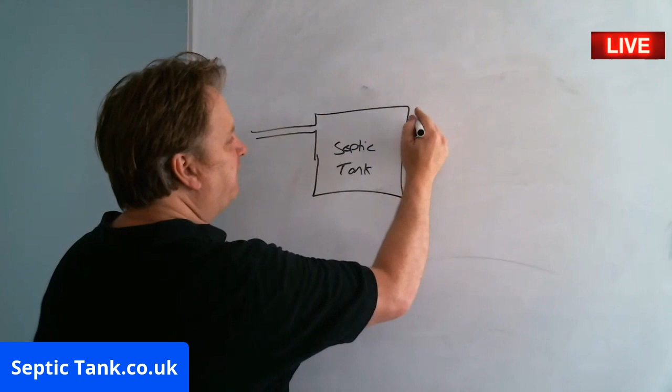Anyway, so let me show you the difference between a septic tank and a sewage treatment plant. So let's start with a septic tank. So let me draw a septic tank. We'll call that, look, septic tank - pretty straightforward, isn't it? So we've got an inlet pipe going into it, and a bit further down we've got an outlet pipe going out of it.

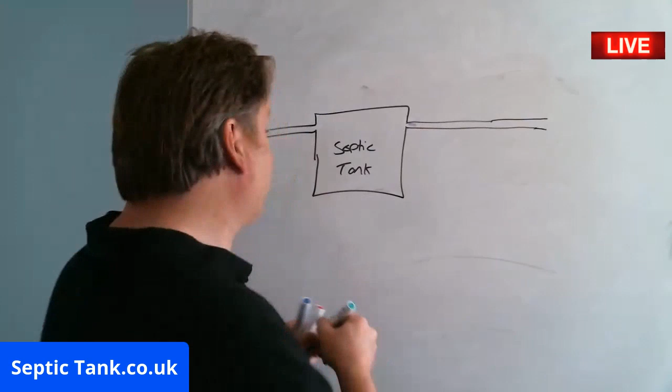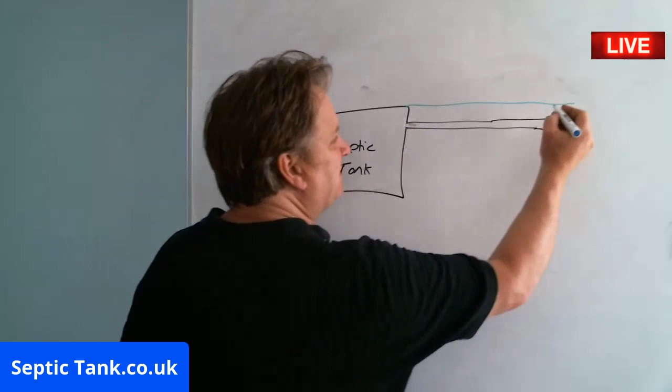Okay, so let me give it some grass - not the stuff you smoke - some green grass. Look at that. And I don't know if grass is any different color, is it? Well, actually, the grass outside is brown today because it's been so hot. But anyway, so here's a septic tank, and that's water.

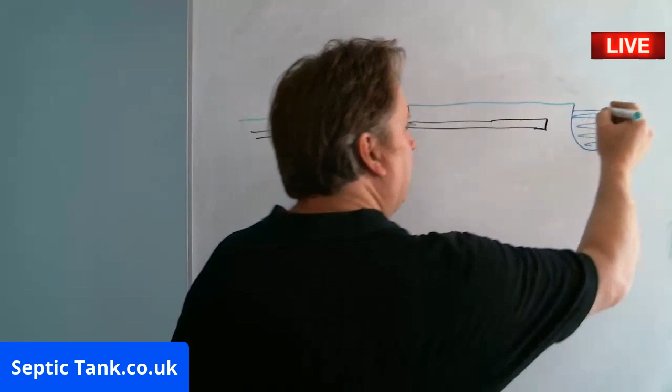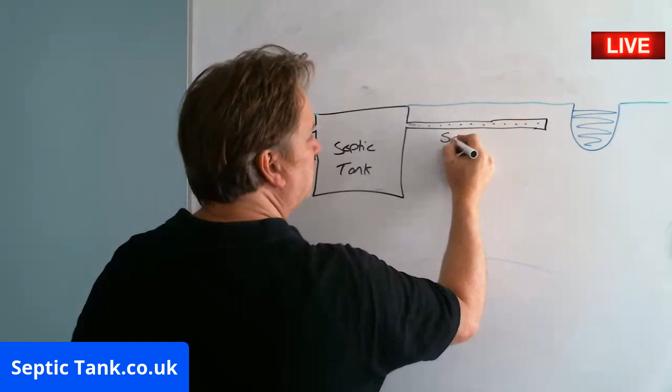And I'll put that there - you'll see where I'm going with this in a minute. And don't tell me you're amazed at my drawing skills, I know. All right, so there's the septic tank, there's the soakaway, there you go. That's not too bad, is it?

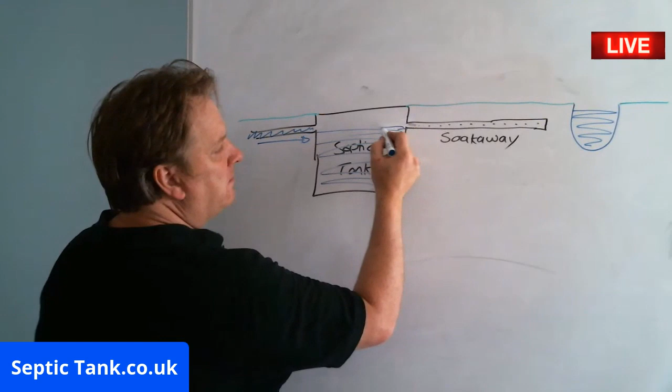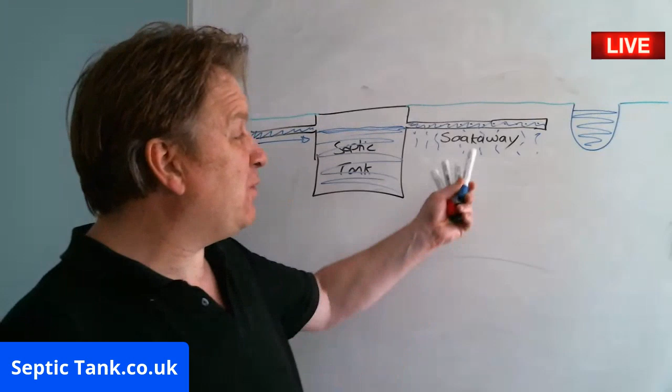Okay, let me quickly explain how a septic tank works. You've got raw sewage in the form of wastewater that goes into the septic tank, and then it fills the septic tank up. Then when it gets to this level here - let's just make it a bit higher - the wastewater then goes into the soakaway here and drains away into the soil. So that's how a septic tank works. The soakaway is probably the most important component of the septic tank, because if the water didn't soak away, the tank would just get full and then it would overflow and stink and back up to the house. So that's how a septic tank and soakaway work.

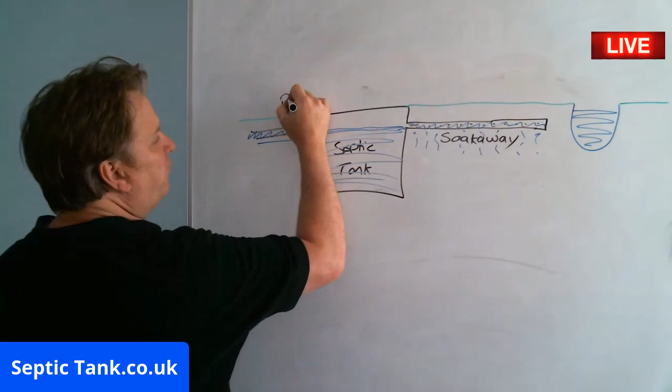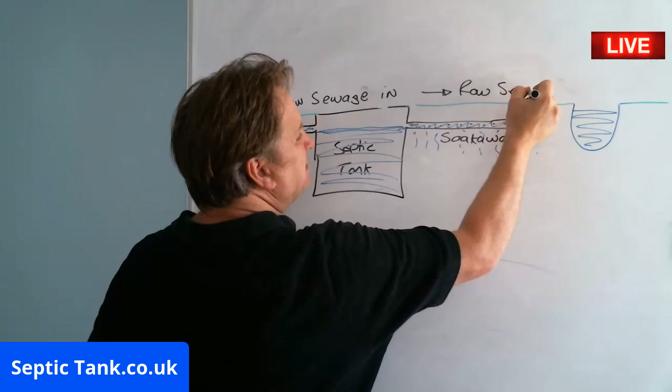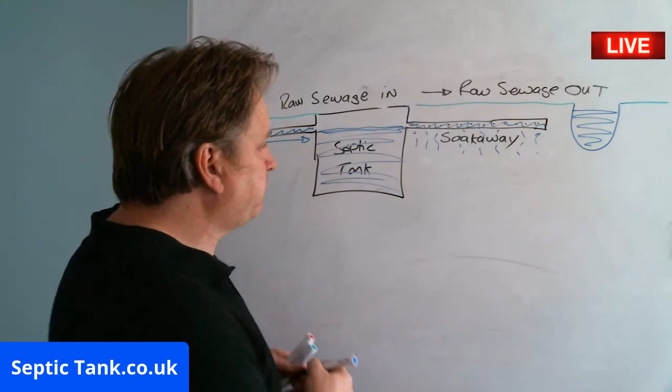I'll tell you a bit more about this thing here in a minute. So the basic difference is: with a septic tank, you've got raw sewage goes in and raw sewage goes out. That's basically it - raw sewage goes in and raw sewage goes out, and the soil treats and cleans the sewage. It's pretty straightforward, isn't it?

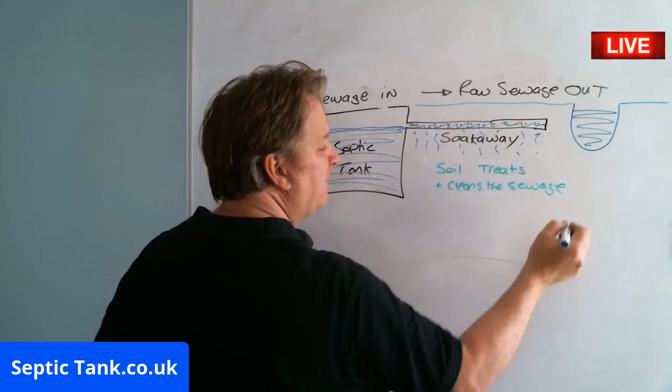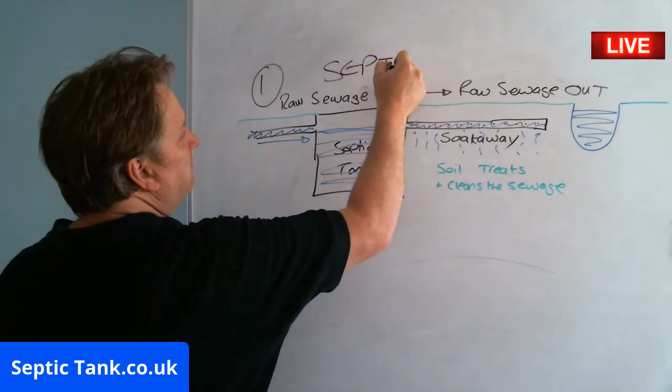Okay, so that is number one - septic tank. Okay, that's cool, isn't it? Okay, so I got the right pens there. All right, so number two now. Now I'm going to show you - let me see how much space I've got there. I keep looking back because I've got a monitor there that tells me if I go out of the area.

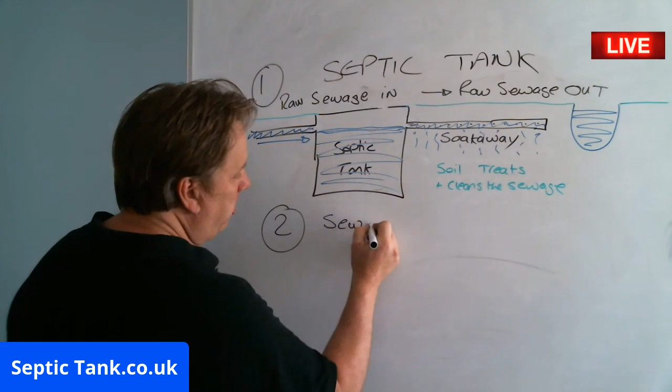So now I'm going to do a sewage treatment plant. All right, so again we've got pretty much the same scenario here - we've got a pipe coming in. But I'm going to give the sewage treatment plant a different colour because they're normally green for some reason - don't ask me why, they're all green, but they are. And it looks something like this - let's give you a typical shape of a sewage treatment plant. I know that looks like something out of Close Encounters of the Third Kind, but it's not meant to be, right? That's what some of them look like, okay?

So you've got your pipe in, you've got your pipe out, and then let me cut - now here's the grass. You've got a green lid because it blends in with the grass. How much have I got there for water? Yeah, I've just got enough.

That's water in there. Is that on the screen? Yes, okay, so that's on the screen. So we'll call that the outlet pipe. There you go.

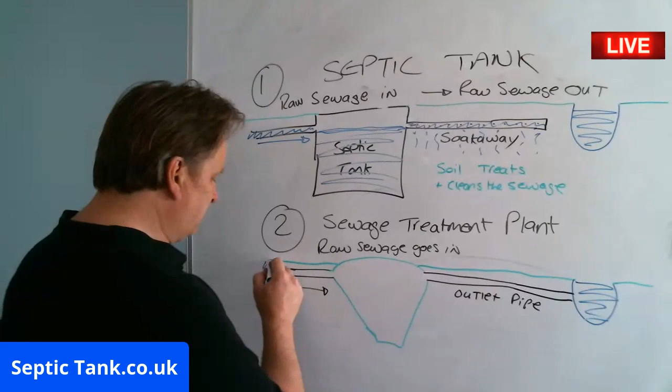So what happens with a sewage treatment plant is raw sewage goes in. You get raw sewage coming into here, right? So here's the raw sewage. Oh, must have had it coming into the wrong place. Hold on, two secs. Let's try again. So raw sewage goes in.

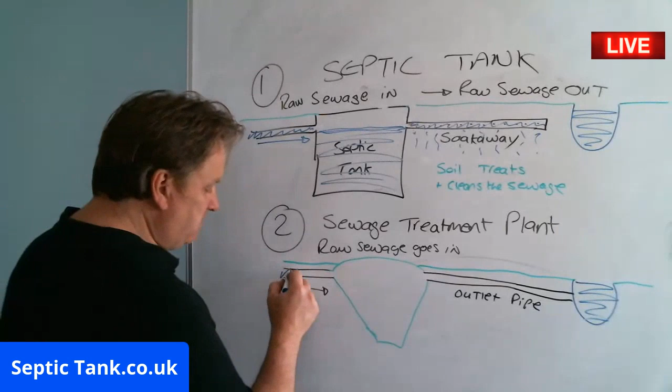It goes into here, and inside these treatment plants you've got like what they call a beehive, and they look something like that. And you've got a motor, and they'll have a compressor.

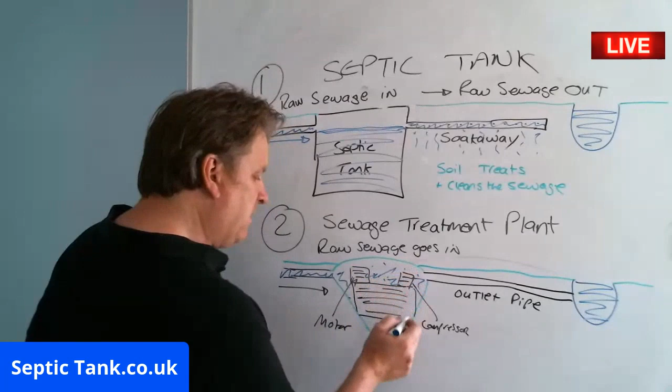And basically what happens, they're like a big aquarium, really. So all the raw sewage goes in, right? The sewage treatment plant's like an aquarium. Loads of water - it basically creates loads of bubbles and loads of noise and loads of movement and all that kind of stuff, right?

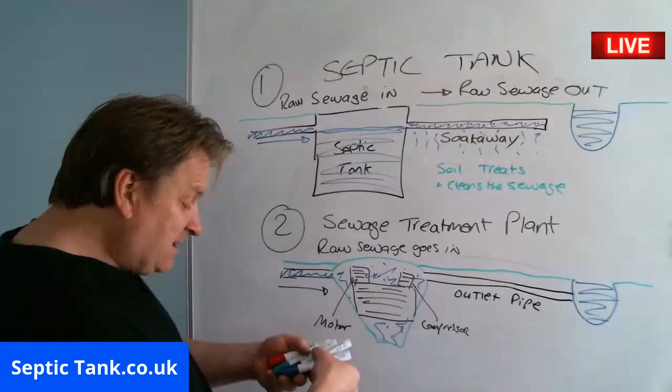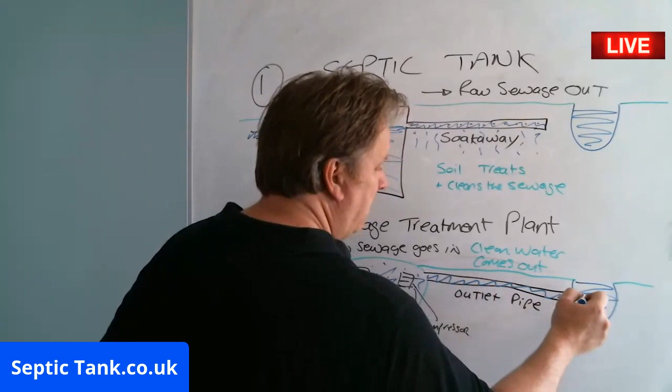That gives the bacteria and the microbes in there loads of energy, right? And those bacteria and microbes, they eat all the bad stuff in the sewage. So raw sewage goes in, but clean water comes out. So here's the outlet pipe - the clean water can come out of there and go into a watercourse, like a river, a stream, a brook, a ditch, whatever you've got there.

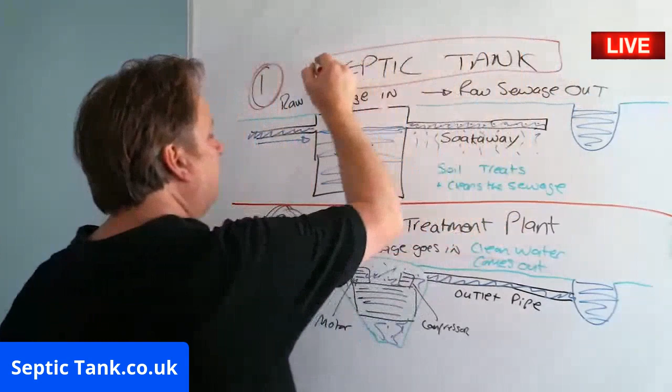So essentially, if I just do a dividing line, right, that's the difference between a septic tank and a sewage treatment plant. All right, so that's how they work. That's cool, isn't it? That's really cool how they work, right?

So now I've shown you how they work - what's the best, a septic tank or a sewage treatment plant? Well, it depends on the situation you find yourself in. Let me give you two classic examples.

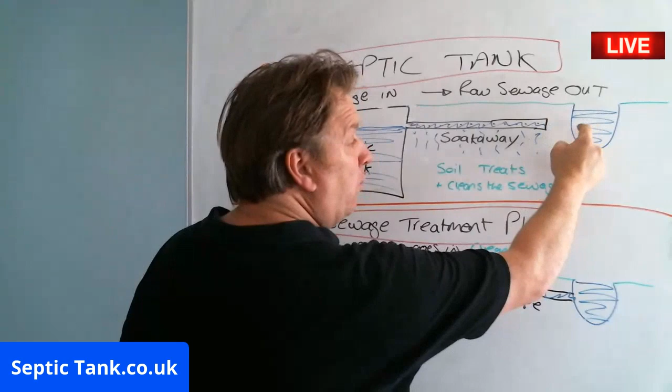On the 1st of January 2020, all the rules and regulations in this country regarding septic tanks are changing. So if your septic tank - and many of them do - discharges into a watercourse or is close to a watercourse, this will become illegal on the 1st of January 2020. So many people will have to replace their septic tank in favor of a sewage treatment plant, because remember, raw sewage goes into a septic tank and raw sewage comes out. You have to wait for the soil to treat and clean that sewage, so it has to go through the land and through the fields, and eventually it makes its way into streams and rivers, but it's been treated and cleaned.

So the ground, the land, treats all the horrible stuff in sewage. It's a long, drawn-out process as it filters through the soil. With a sewage treatment plant, as I said, you've got compressors and motors and pulleys and belts and shafts and cogs and electricity and pipes and wires. Yes, it uses electricity, and yes, they are expensive to run every year, but they turn that raw sewage into clean water, and that clean water can then discharge directly into a watercourse.

So if you live near a watercourse, then obviously you go for a sewage treatment plant, because you're not endangering the life of your family, you're not polluting the environment or doing anything crazy like that. That would be the sewage system of choice. However, that's basically the difference between the two. If you don't live by a watercourse, say the stream's half a mile away, quarter of a mile away, then this is overkill.

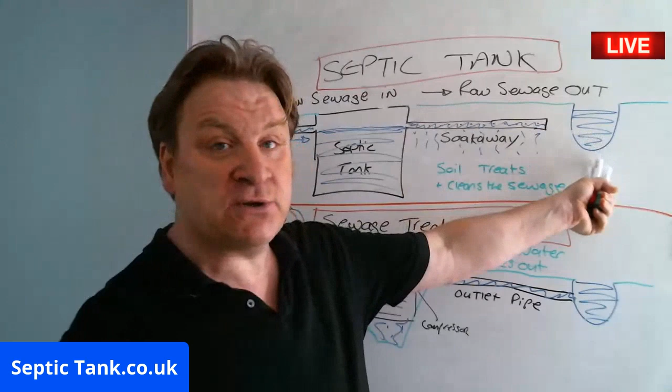I just want to throw a curveball into the mix. Many people are being quoted 15, 20, 30 thousand quid to replace their septic tank and soakaway if they live near a watercourse, in favour of a sewage treatment plant.

Now, how much do these sewage treatment plants cost? Well, they can be quite cheap if you've got a 1 or 2 bedroom house, but once you start getting onto a 3 to 4 bedroom house, incorporating 5, 6, 7, 8, 9 people, some of these biodigesters you can be looking at paying 15 to 25 grand, easy.

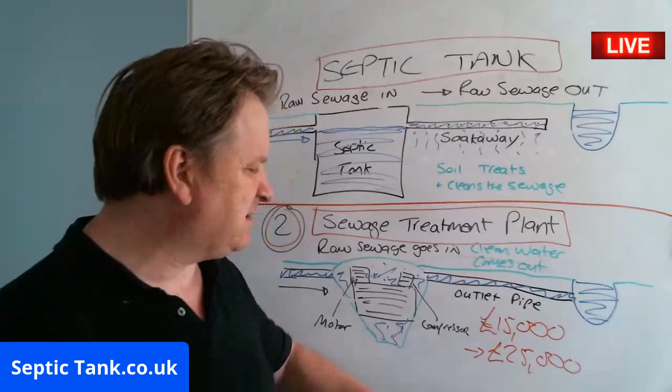So how much does a septic tank and soakaway cost? Well, I sell septic tank and soakaway kits on my site, and they're 1,499, so 13,000 to 23,000 quid cheaper than that. There's a hell of a price difference between the two, to be honest.

Not that I'm demonizing sewage treatment plants, because they're very good in certain circumstances, but I just want to give you a little tip now. Let me give you this little tip, right?

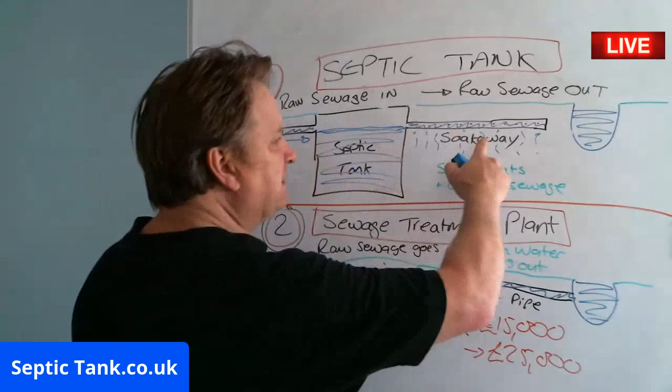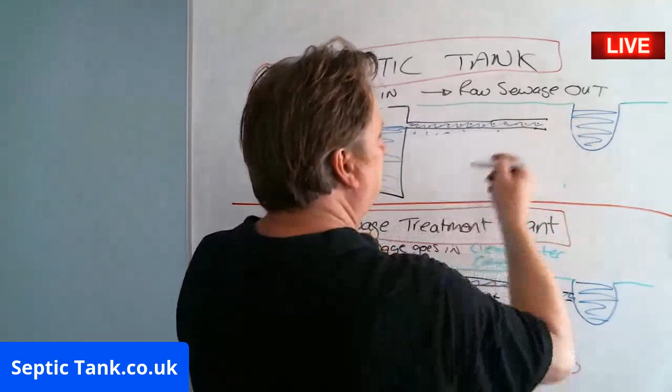If you've got a septic tank and a soakaway that's near a watercourse, you don't necessarily have to replace it for a 15 to 25,000 quid system. All you need to do is this. Let's say this pipe here was discharging into the watercourse. And yes, I know it's going to be illegal, but this is all you need to do, right?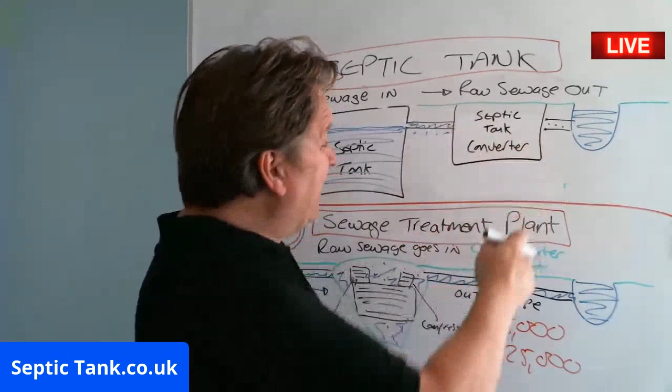All you need to do is put in something called a septic tank converter. They're a non-electric unit, a little black unit like this. They're non-electrical, government approved. All the raw sewage goes into it, and clean, beautiful water comes out of it.

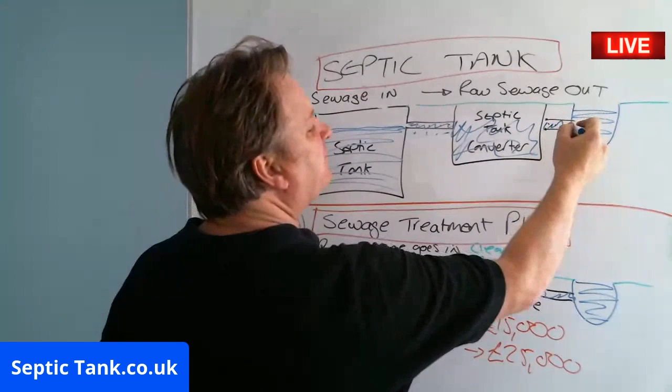And how much do they cost, the septic tank converters? Let me tell you, they're nowhere near 15 or 20 or 30 grand. They cost 2,999. So yes, they're 12,000 quid cheaper than the cheapest quote you're going to get for a sewage treatment plant, and up to 22,000 quid cheaper.

For me personally, I've been in the game for 20 years. I consult for the Environment Agency and UK Building Regs and everyone. I love helping people find cost-effective solutions to their septic tank and soakaway problems. Point I'm trying to make is this, right?

If I had a bit of land and I had a septic tank that goes straight into a watercourse, I'd just put a septic tank converter in, because they're non-electrical, they can't break down, they don't need servicing every year. They work on venturi suction, so they suck air in and exhale air, and the bacteria in there eat and treat everything, converting it into safe, clean, organic waste water. They're amazing, they really are amazing.

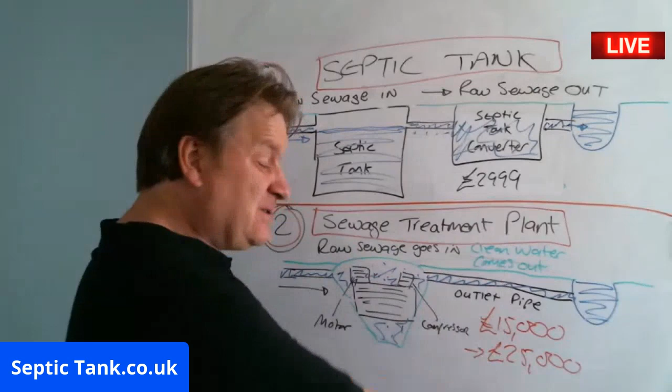So, given the choice between spending 15 to 25 to 30 grand on an electric system that breaks down after the year's warranty is over, having to spend 1,000 to 1,500 quid a year on electricity costs, and 300 quid a year getting them serviced, for me these are becoming like old dinosaurs. I'm not demonizing electric sewage treatment plants, I'm just saying they're old technology.

New technology is moving on, and the government are approving non-electric systems now that don't break down, that are government approved and will clean your water. They'll protect your family, they'll stop pollution and protect the environment.

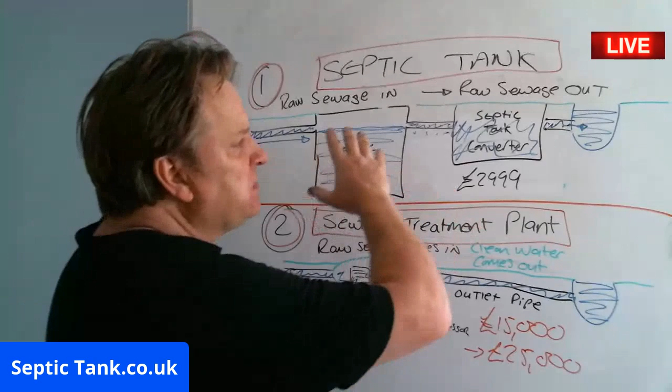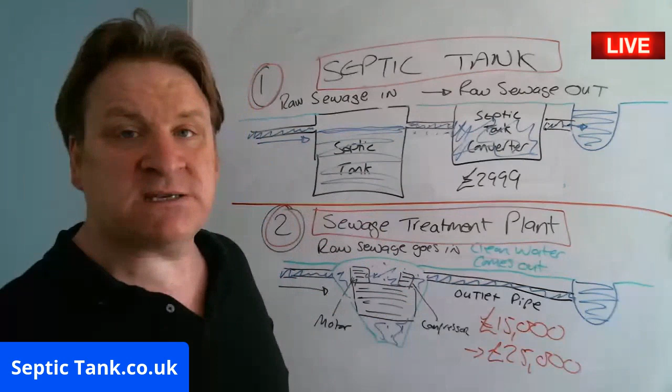So for me, if there's no watercourse about, I'll put a septic tank and soakaway in any day, because there's no faff in maintenance of them, especially if you put some of the septic tank soakaway worms in that we do. And worst case scenario, to make my septic tank fully legal in lieu of the new rules and regulations that come into force, I just put a septic tank converter in, save myself 15, 20 grand, easy. So there you go.

That's the difference between a septic tank and a domestic sewage treatment plant.